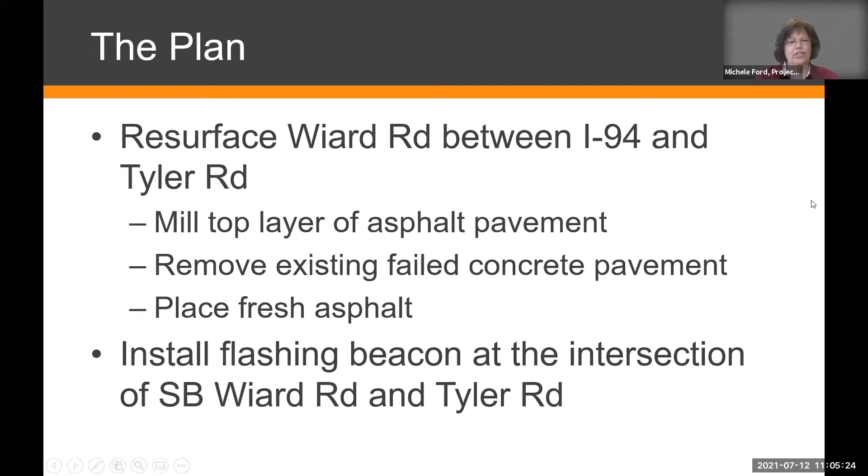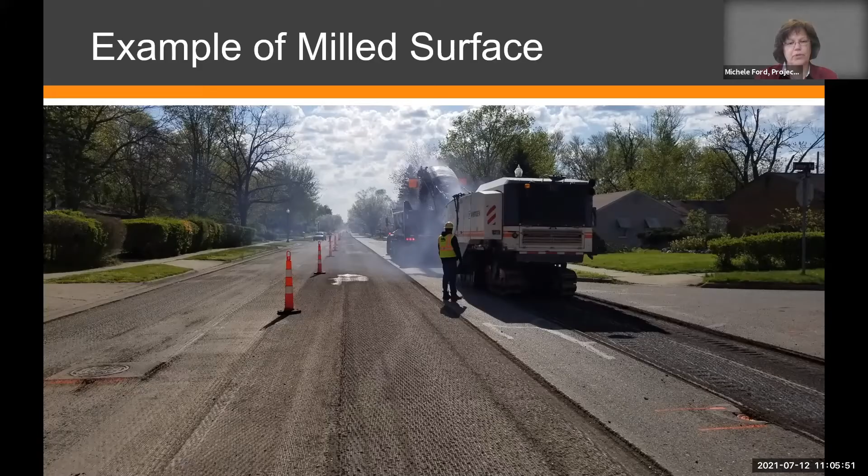Thank you, Matt. So Emily, you can go to the next slide. So I just have a few slides with example construction pictures. When we do a milled surface, we go in there with a big milling machine and they grind off. In this case, it's going to be 3 to 3.5 inches of asphalt. And since the road will be closed, you won't have to worry about driving on that milled surface. I know that some people are uncomfortable doing that, so we won't have to worry about it on this one. Next slide.

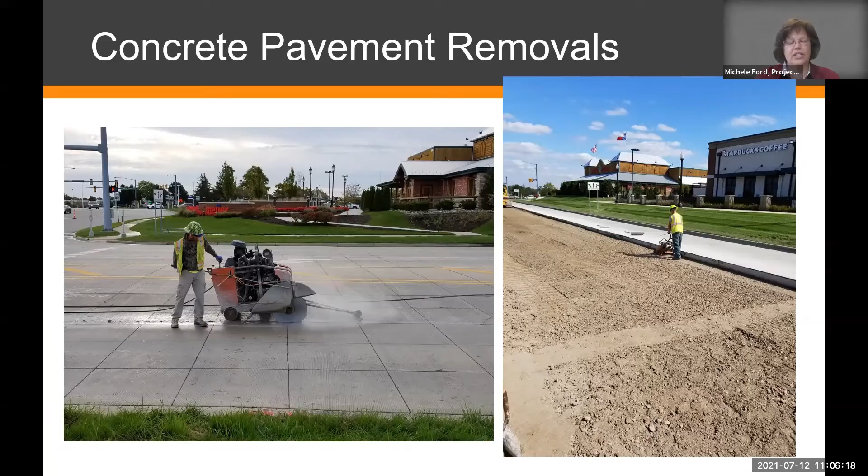And like I said, in some portions, we're going to be doing full concrete pavement removal. So they'll have to go in there and saw at the limits, and then they'll take all of it out as it shows here on the right. And then we'll put some aggregate base down, and then we'll top that with asphalt. So whether it be concrete or asphalt coming off, all asphalt is going back. Next slide. And here's a picture of one of our paving crews from last year putting on the HMA pavement.

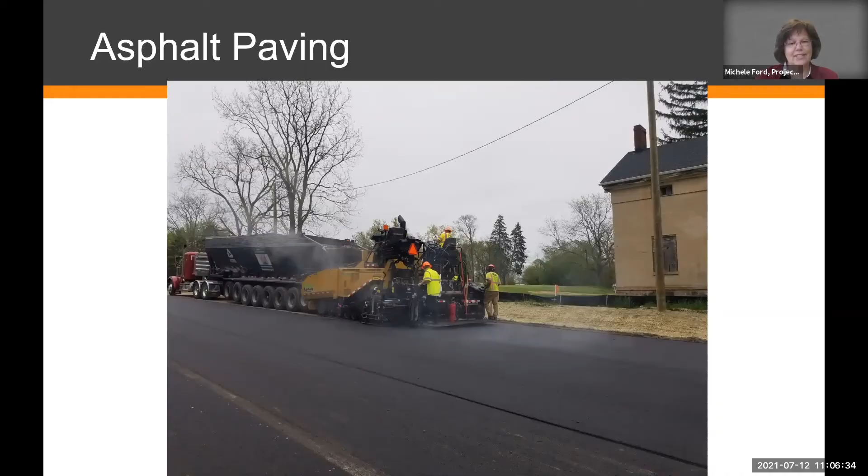There's been some concerns. Wiard is a higher speed road that people go through and don't necessarily recognize that a car could be turning from Tyler. So this just gives them another visual aid to help with the safety of that intersection. But like I said, it won't stop anything on Wiard or change that traffic configuration. It just is a safety feature. Next.

So our timeline right now, next slide, we are planning to close it as of August 9th. We wanted to make sure that we were not interfering with the air show that's going to be that previous weekend, so we're waiting until that is finished. Right now the tentative date is August 9th. That is subject to change due to the contractor's schedule. We're going to close the road. I'll show you the detour in a minute. It's expected to last up to 4 weeks, weather permitting.

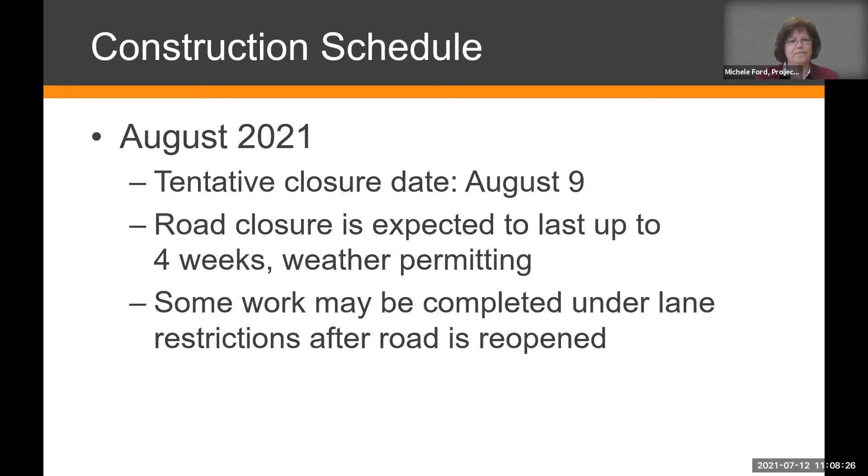Now coming westbound, you'll have to get off at the Rawsonville exit rather than getting off at Wiard Road. Everything will be accessible from the east side. So we're hopeful that this won't be too impactful. We did our best to stay out of the construction on US 12 so that they'll be completely separate projects and not have to get into the detours and such that are set up for that project. Next.

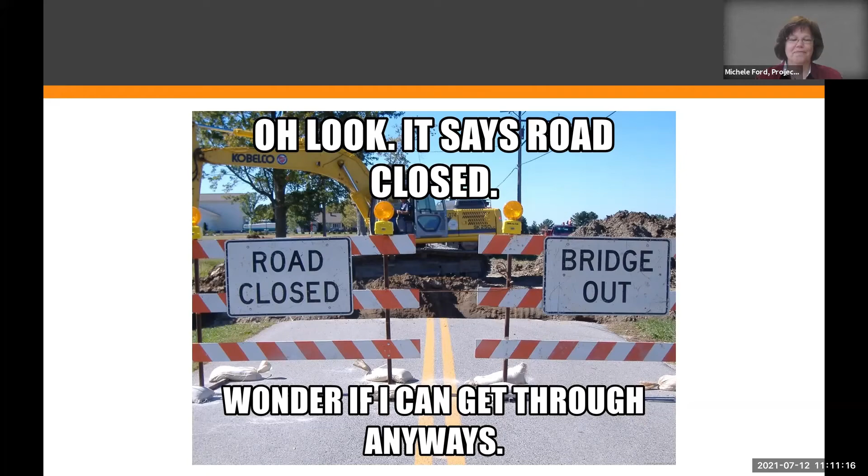Okay, and that is it for me. Emily is going to show you how you can access our project page and get updates on the project.

Thanks, Michele. Yeah, let me just get my screen share switched around here and I will show that exact thing. So let's see. All right, you should be able to see the website. Michele, can you nod your head? Okay, great, thank you. So again, thanks everybody for joining us, and thanks Michele for the information.

You can find all this, and we will post a recording of today's meeting. We'll post the slides that we're sharing as well to the project page, so I can show you how you can get to that. The Road Commission's website is wcroads.org, and this will take you to our homepage here. And if you scroll down, you can see that we've got latest roadwork updates, and we put out advisories ahead of road closures or lane restrictions, that kind of thing.

You can also click here to explore our interactive project map. And so if you do that, that'll load this entire current projects page, this map, and you'll see all these different blue segments and the red dots all represent major projects that we have going on this year. So you can see it's been a busy construction season so far.

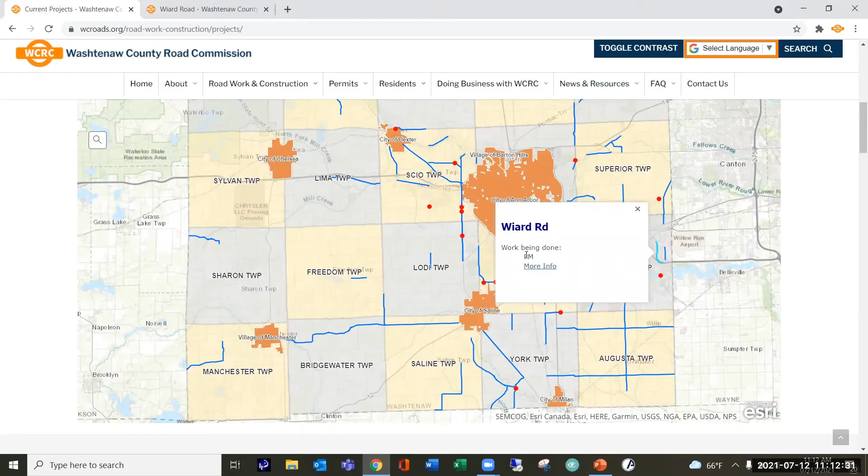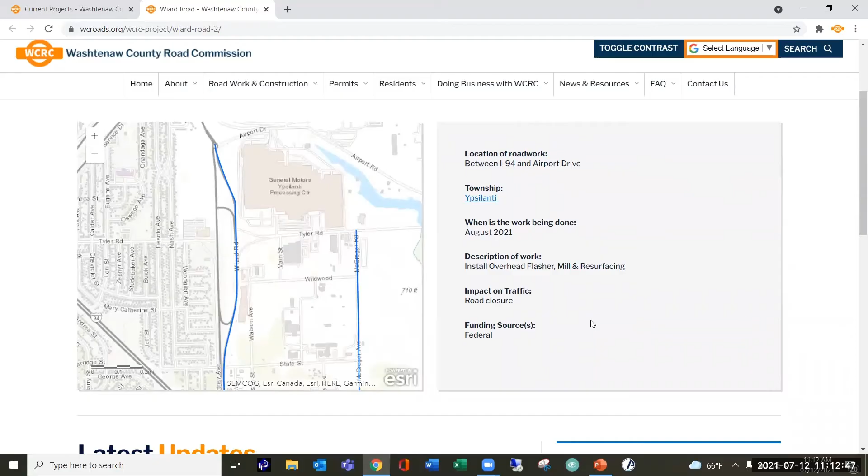If you go over, you can click here on Wiard Road, and that is a PM job, a preventative maintenance job. And so if you click this more info, it'll open up the project page that has all this information on it. And this is again where we will post the recording of today's meeting, where we'll post the slides from today's meeting. We've got a little bit of the basic information here about the project. And then we also have Michele's contact information.

Under helpful links is where we'll post today's recording and the slides. We've got the announcement about today's meeting. And then under here as well, we'll post updates throughout the project, throughout the closure, just to give you updates on how we are progressing through the project.

If you would like to receive those updates via email, you can subscribe to receive project updates via email. You would just click this button here. It'll take you to our subscription page. You just would put your email address in here.

If you want to receive updates about other things going on in Ypsilanti Township, you could. We do all sorts of, like I said, road advisories, lane restrictions, when we've got work coming up in a specific area. And then you would just mark down here, if you want to receive Wiard Road resurfacing updates, you would select that box here and hit subscribe. And then anytime we put an update out, we will send you an email with that information to your email address. So with that, let me get back to the presentation.

Turn my video on, resume the share here. Okay, and with that, we will open it up for Q&A. Let me get my screens all up here again. And so if you would like to make public comment, we'd ask that you either ask your question in chat, which you're welcome to do, and then I'll read that out loud.

Or if you would like to make a verbal public comment or ask a question verbally, you can join from your computer or smartphone by looking for the reactions button on your Zoom meeting and then select the raise hand button. And then I will unmute people one at a time with a raised hand. You may also see it under the participants button. It depends on which version of Zoom you have on your computer, but it'll either be there under reactions or under participants. If you have joined us today from your touch tone phone, you can dial *9 and that will virtually raise your hand.

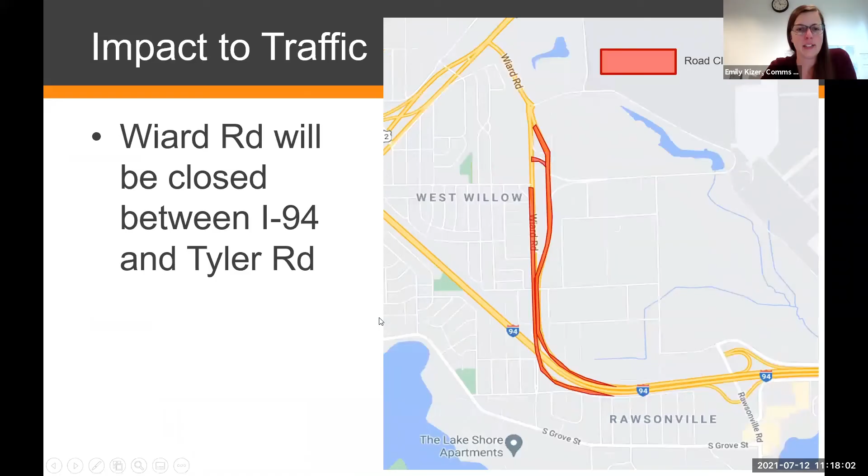And then let's see, we've got Joanne has raised her hand. Joanne, you should be able to unmute yourself. Joanne is one of our road commissioners. Go ahead, Joanne. Good morning. Yes, I had to step away for a minute, so you probably mentioned it about the blinking light. Is that going to be at Tyler and Wiard? Yeah, let's go back to that slide. Michele, do you want to talk a little bit about that? You bet. If you can find that slide.

So this slide here kind of explains what we're going to do. They're going to put up 2 wood poles. It's just a simple wire span across, and there'll be 1 light, and it's going to blink red to Tyler Road to stop that traffic. And then it will be yellow on Wiard. So it's not going to stop the traffic on Wiard, but it will be a visual cue to them that there's an intersection there and that they should be cautious, because there could be vehicles exiting onto Wiard from Tyler.

Right. Tyler will still have their stop sign. So it really isn't changing anything, but it will make it more visually aware, people will be able to see it a little easier. Yes, I do like that light there. So there have been people wanting a traffic light back there. The only thing, you have so many people wanting the traffic light, and then you have so many people saying, why is there a traffic light there? Because I sit there and there's no traffic, so this seems like the middle. And so I think this would really work well with people that want the traffic light and people that don't want the traffic light.

Right. And in order for us to put a full traffic signal that stops traffic, there are very specific warrants that have to be met. And this particular intersection doesn't meet those warrants. So like you said, this is kind of a happy medium. It does show that there's something there, but we're not stopping that traffic on Wiard. So I think it hopefully will be a good enhancement to the intersection. Thank you. Thank you, Joanne.

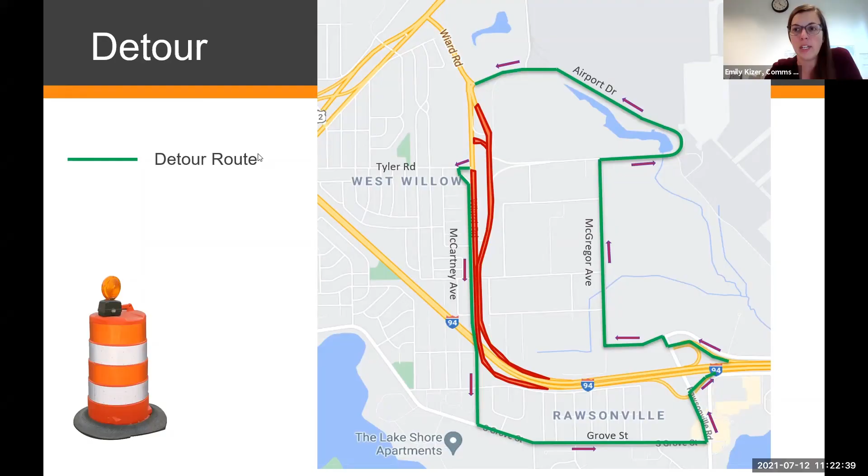Michele, we are planning to start hopefully in August. Right now, the tentative start date is August 9th. But with all this rain that we've been having, our tentative start dates for paving projects have been all over the place. So hopefully Mother Nature cooperates and gives us some dry, nice paving weather in the next couple of weeks to help us all out. But is there anybody else that has a question? Yeah, is there anybody else?

I was going to say, because sometimes, if we get to August 9th and it's beautiful and you say, why aren't you starting? Well, it could be because right now it's raining and it's delaying them and they need to get other things completed before they get to this one. Yes, so our paving contractors have very tight schedules from about end of May through November. So there's a lot to try to pack in across not just our county, but multiple counties.

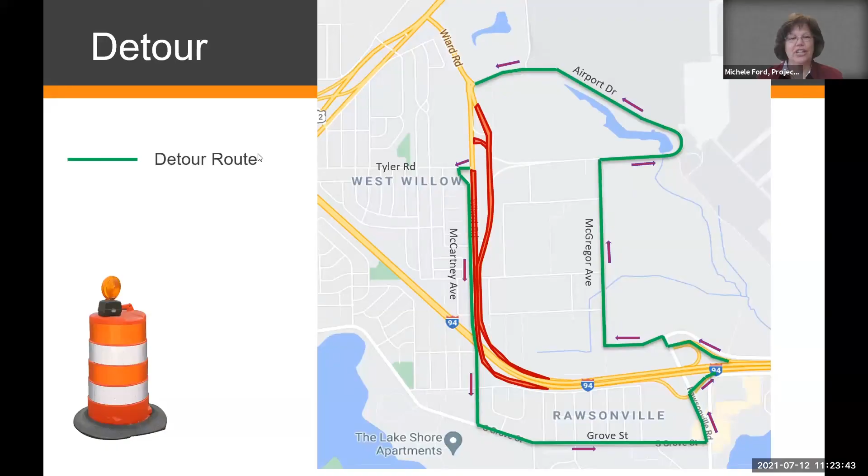So Matt or Michele, it looks like we're all set. We've gotten through all of our questions, no more raised hands. Is there anything else you guys would like to add to the meeting before we make it short and sweet today? Just thank you for your patience during construction. Yes, thank you. And if you have a question during construction, I think Emily's going to have my contact information up there. Feel free to call me or email me, and I will do my best to answer your questions.

Thanks, Michele. I'm going to put in the chat one more time where you can find the project page. And if you go to that link, we've got Michele's contact information there. We really encourage you to sign up to receive email updates. We try to provide some information, especially as we get closer to the start of construction and then also during construction. I think everybody likes to know what's going on and where we're at in the project. And so we do that through project email updates. We'll also post those to our website. So we appreciate everybody joining us.

Oh, go ahead, Michele. I was just going to say one thing I just happened to think of as you're talking about as it gets closer to construction. We do have portable changeable message signs out there right now that we're advertising for today's meeting. And we'll be moving those around a little bit and updating those as it gets closer to construction as well. So there'll be dates on there to alert you when construction is getting closer. Great. Thanks, Michele. We'll also post an advisory before that closure on our website as well and send it out to anybody who's subscribed to receive either Ypsilanti Township updates or project updates for that closure.